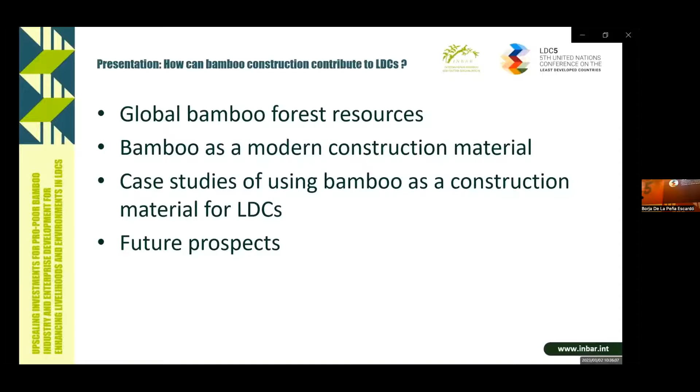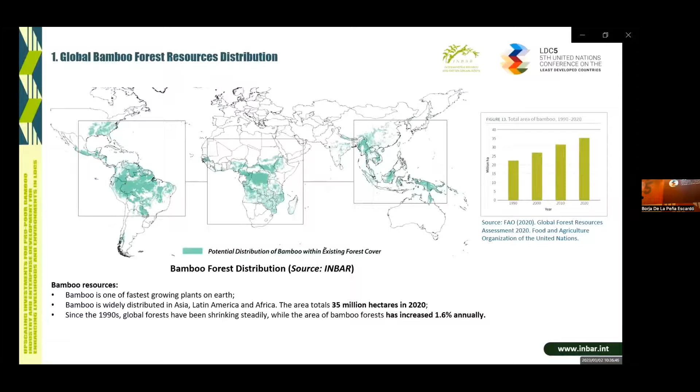Bamboo is really a lovely plant which can contribute to 7 of the UN's SDGs, and it is very close to human life. We could find more than 10,000 bamboo products in the market. Bamboo can really contribute considerable economic value in both domestic and international markets.

Let's have a look at why we can use bamboo as a modern construction material. The first reason is its local availability. There are more than 1,600 bamboo species around the world, although we estimate there are no more than 100 bamboo species which we could use directly for long-term bamboo structures. We can still find commonly used bamboo species for construction purposes in Asia Pacific, the Americas, as well as Africa.

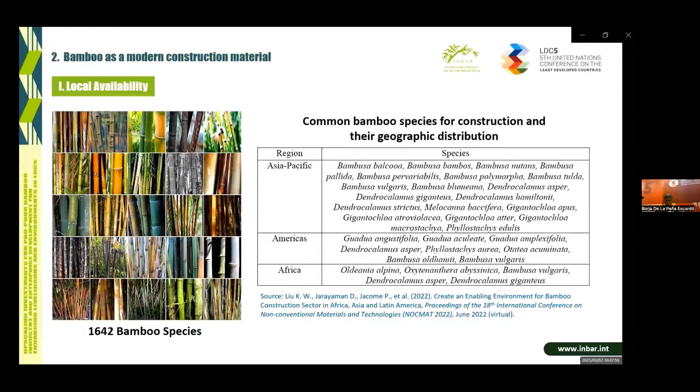The second reason is bamboo's excellent physical and mechanical properties. Bamboo has a natural, optimized structure: hollow, straight, with diaphragms. Can you imagine this material? The tensile strength parallel to fiber of some species is equivalent to that of steel. The compression strength parallel to fiber is equivalent to that of concrete, and its shear strength parallel to fiber is much higher than that of timber.

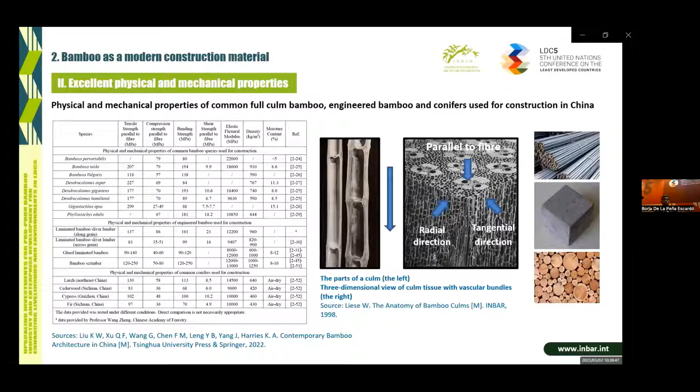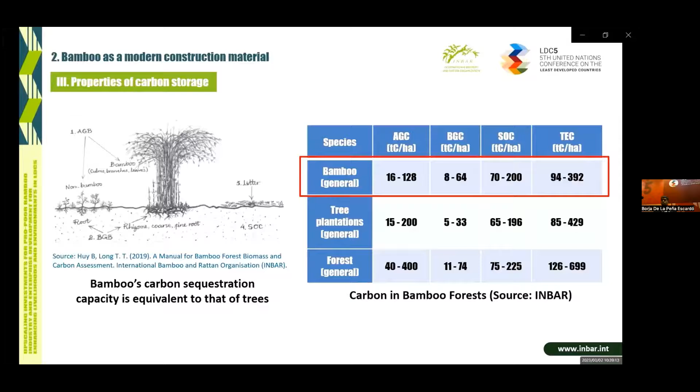The third reason is bamboo's carbon storage capacity. Due to climate change, global scientists are thinking of different ways to help reduce carbon dioxide. Bamboo's carbon sequestration capacity is equivalent to that of trees, which can help mitigate climate change. If we use bamboo to produce durable products, especially as structural components in permanent buildings, carbon can be stored for more than 30 or 50 years. Bamboo could be a good substitute for traditional, higher carbon intensity construction materials such as concrete and steel.

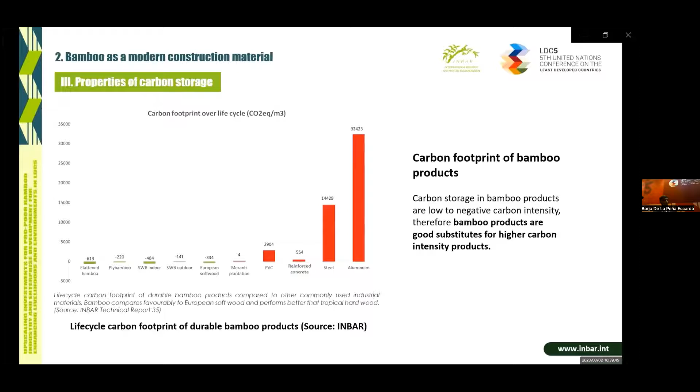Nowadays, we can easily find various commercial bamboo construction products in two categories: round bamboo and engineered bamboo products in both domestic and international markets.

After harvesting and proper treatment, round bamboo culms of different species with age between 3 to 6 years and diameter more than 5 centimeters can be used directly as structural components in buildings. With more stable physical and mechanical properties and uniform sizes, engineered bamboo products become more and more popular and gain commercial importance in the international markets.

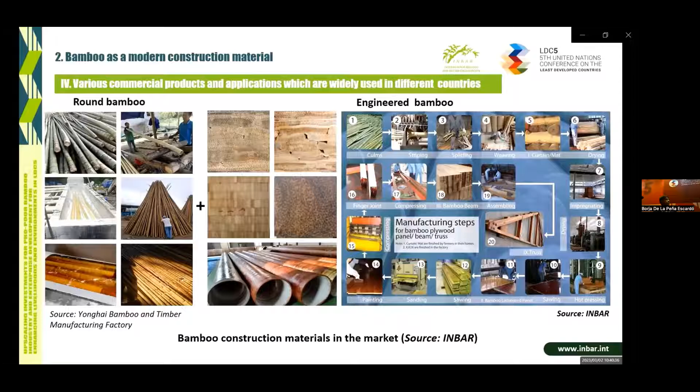There are 5 major applications of bamboo for construction across the world. We can use bamboo for decorations in large-scale public buildings like art museums, theaters, airports. We can also use them in 1 to 3-story buildings as structural components. Open bamboo landscape architecture attracts more and more landscape designers nowadays. Small-scale transportation infrastructure and water pipes can also use bamboo materials.

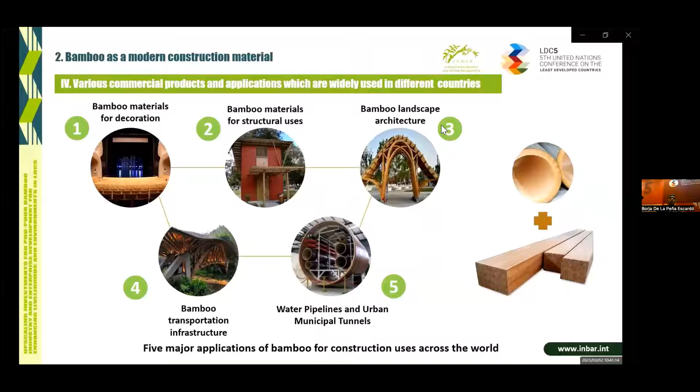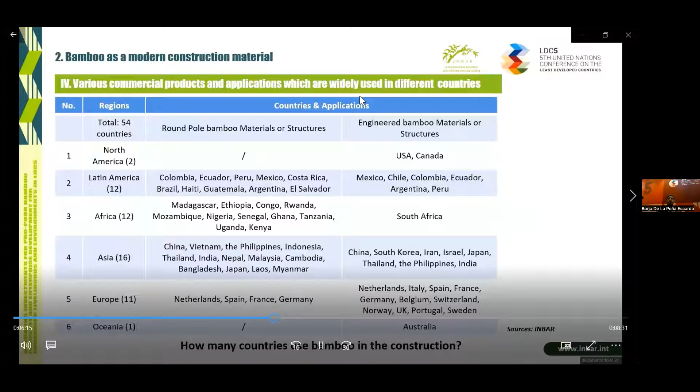According to INBAR data, there are more than 50 countries using round bamboo or engineered bamboo materials or structures. Since 2000, INBAR has been working with global experts to start the work of international standardization for structural uses of bamboo. International standards for round bamboo structures have been well established, while those for engineered bamboo structures are under development.

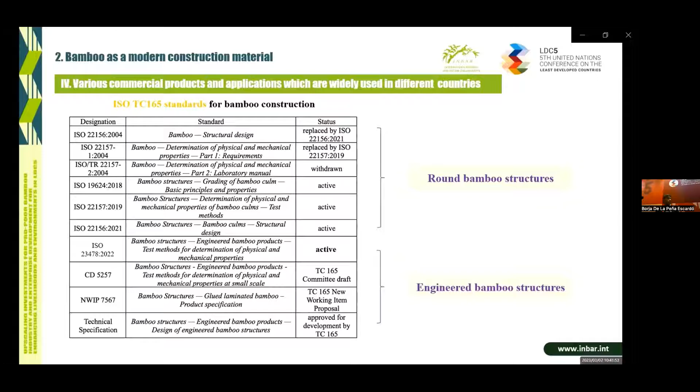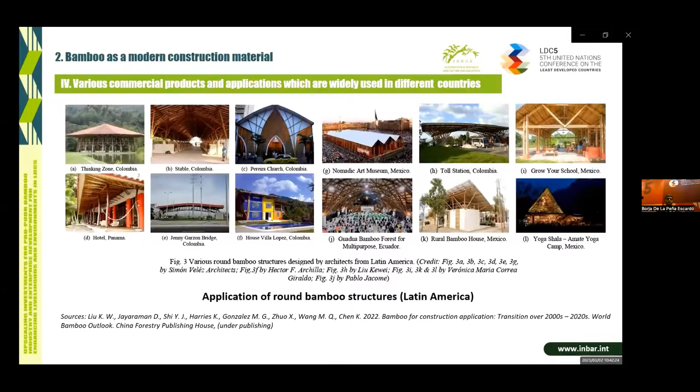Nearly 20 countries have issued their national standards on bamboo construction. Therefore, you can find various round bamboo structures in Latin America, in Mexico, Colombia, Panama, Ecuador, in Asia like Indonesia, India, Thailand, and China. Lots of engineered bamboo structures have also emerged in recent 7 to 8 years in China, also for temporary buildings after earthquake disaster.

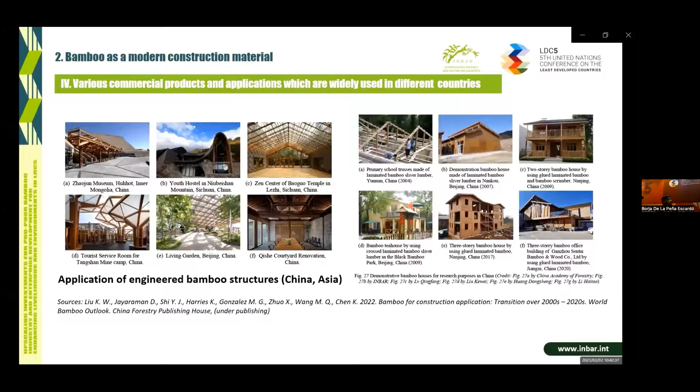Now, let me share some INBAR experience based on several case studies of using bamboo as a construction material for least developed countries. In 2011, INBAR worked with the Ministry of Agriculture and Forests of Bhutan to help them explore how to use bamboo to replace timber for construction purposes, to keep Bhutan's forest cover more than 60%. We used modern technologies, used less timber, lowered the price, and adapted existing local carpentry skills there.

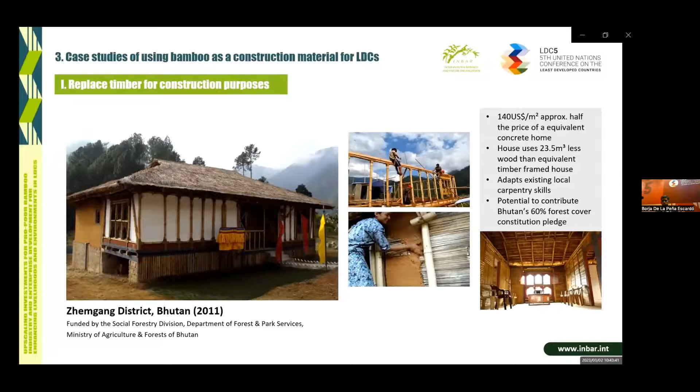At the same period, we trained local workers and students by teaching them how to use raw bamboo as well as newly emerged engineered bamboo as modern construction material, to promote local industry through our East Africa project.

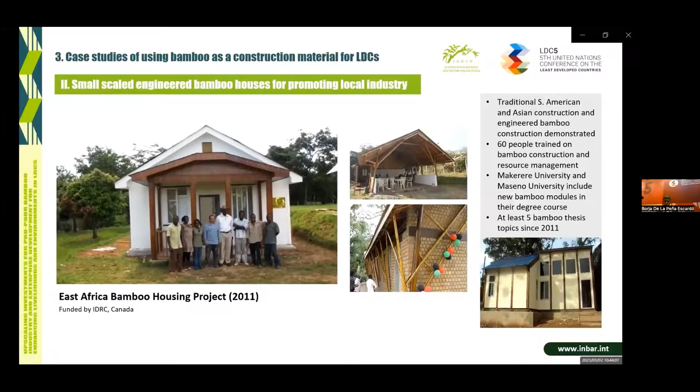In 2016, after the earthquake in Nepal, INBAR organized experts to design bamboo classrooms to help post-disaster reconstruction. Local bamboo was used legally there for the first time for classroom reconstruction.

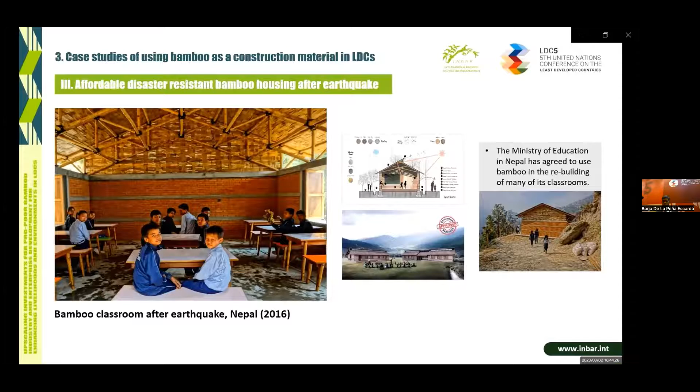Although there is no least developed countries in Latin America, what we have done in Ecuador in the past 10 years can also help those least developed countries who have the same problem, such as the needs of adaptation to climate change. Improved design, preservation, and new engineered panels of a new elevated bamboo house have greatly lengthened the lifespan from a traditional 5 years to 20 years.

And above all, the demonstration bamboo house is not only a durable house, but also has an elegant living condition.

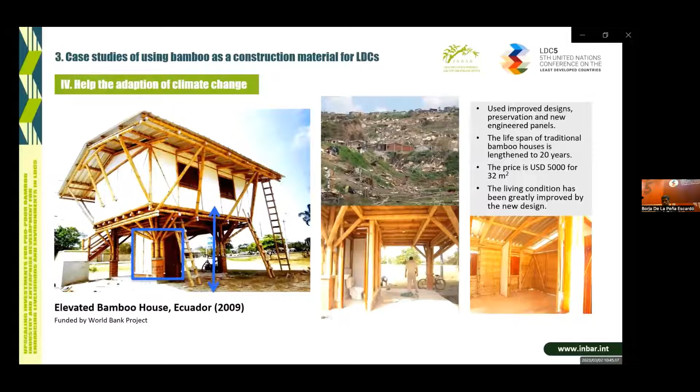The demonstration house, which we built during 2018 to 2019 in Ecuador, shows to the local authorities and general public how bamboo is a natural resource which can help countries face the effects of climate change and provide practical and quality alternatives for the population through resistant building systems.

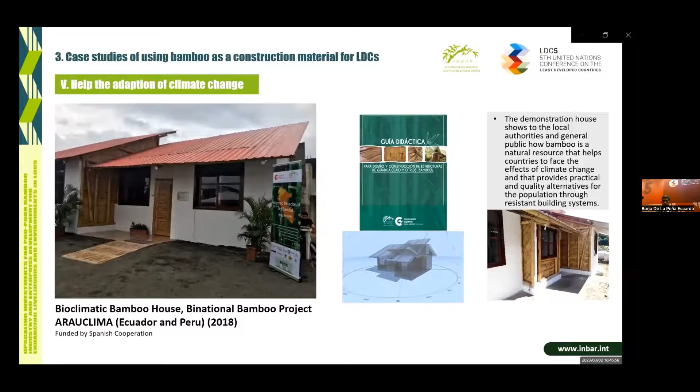For the projects carried out in India in 2017, we helped the local community identify construction species for shelter construction, and provided strategies and approaches to improve the durability and disaster resistance capacity of local bamboo houses.

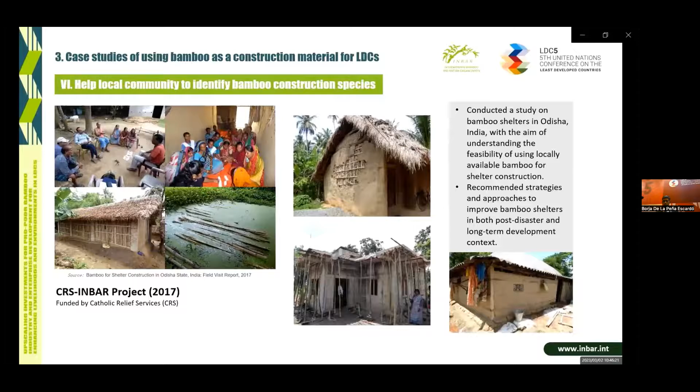For the 2019 BRAC construction training program, aimed at training 4 construction professionals from BRAC based in Bangladesh, we taught them how to use bamboo as a construction material, how to improve durability, and delivered a series of training courses, leading them to visit a series of enterprises located in China, showcasing how to build a modern bamboo house using modern technologies.

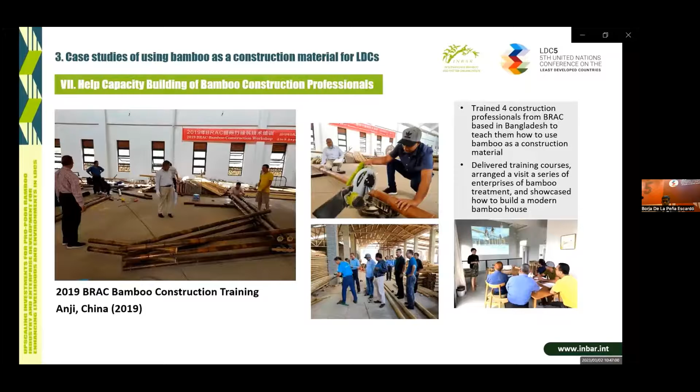There are still lots of challenges to mainstream bamboo use as a construction material, like how to make a sustainable supply chain for bamboo construction species resources, how to properly harvest and mark the proper age of different bamboo species, how to make proper treatment and joints, and how to develop national policies and national standards.

However, I am very sure we can do something for those least developed countries who are willing to use bamboo. Firstly, I think we can help those least developed countries who have bamboo resources to identify bamboo construction species and learn how to carry out sustainable management of bamboo forests.

Secondly, help least developed countries who are interested in using bamboo as a construction material to adopt ISO standards as their national standards. The third one, help them develop national policies for using bamboo, not only for construction. The fourth one, help them strengthen the capacity building of bamboo construction professionals by using the expertise of the bamboo construction task force, which comprises more than 30 bamboo construction experts from nearly 20 countries across the world.

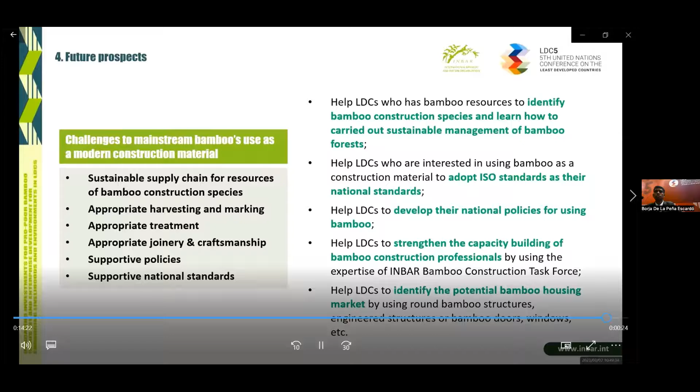Because of time limits, I have to close my presentation. Here I provide my email address. If you have any questions, please feel free to contact me or discuss with my colleagues.

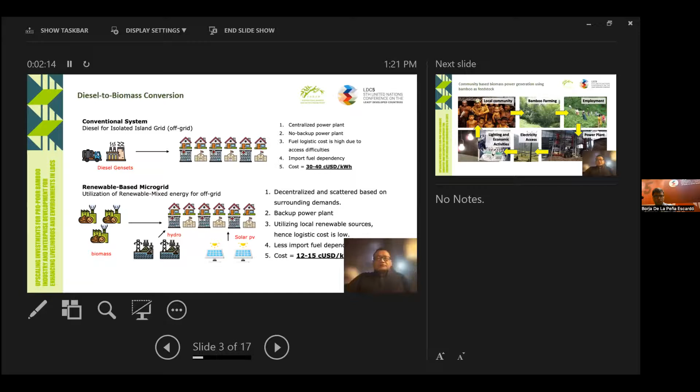We see this opportunity in Indonesia to replicate this model to other regions as well, because the government of Indonesia has established an entity called Indonesia Environmental Fund. The role of this fund is to give incentive for the local community to grow bamboo, and we as IPP then become operator of this bamboo, and we use this as a biomass feedstock. What we provide electricity through the state-owned utility company, then the PLN will also save money.

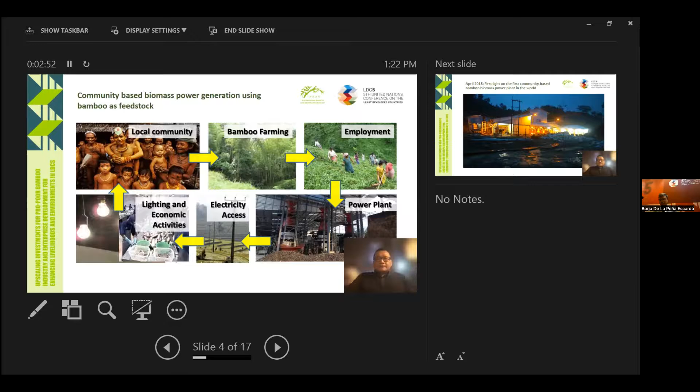So it means that the government provides incentive not only for the local community, but also they will be able to subsidize the electricity from the people, and we get these carbon credits that we hand over to the government, and in return government provides this incentive. So we put these findings and model into our collaboration with the CIFOR-ICRAF.

So we discussed about how we make sure that there's a monetary return, human return, and also nature capital return. So it's not only that it will make money for the investor, but also it will bring multiple benefits to the locals, and it protects the environment surrounding this power plant.

We also collaborate with Alliance for Rural Electrification to disseminate about this idea, and back in 2019 they published this report, and they compare the bamboo biomass power plant with the solar PV or small hydro, and the findings are quite exciting because the bamboo biomass power plant creates more jobs and also has much higher emission reduction. So I think that's good news.

So I think this is a model that can be replicated to other developing countries. And we are collaborating with CIFOR, not only to produce bioenergy, but we are thinking about producing biomaterial. Bioenergy, and the whole green economy thing, will help the whole world to keep the temperature below 1.5. That's the goal, and I think bioenergy will play a big role in that.

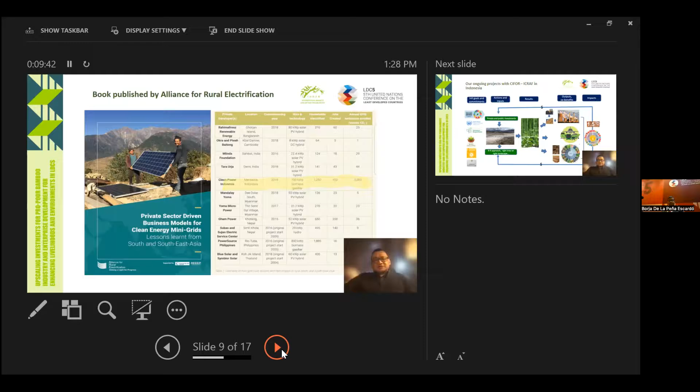And the overall impact, I think, is going to be huge for Indonesia. Not only can we improve electricity supply and distribution for 25,000 villages, but also restore 14 million hectares, and diesel gensets can be replaced. We normally speak of around 2,000 to 4,000 megawatts.

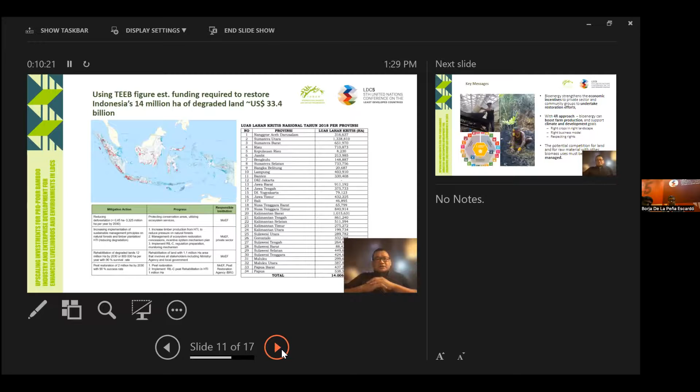And that is all for today. I'd like to get back to the moderator for question and answer. Thank you.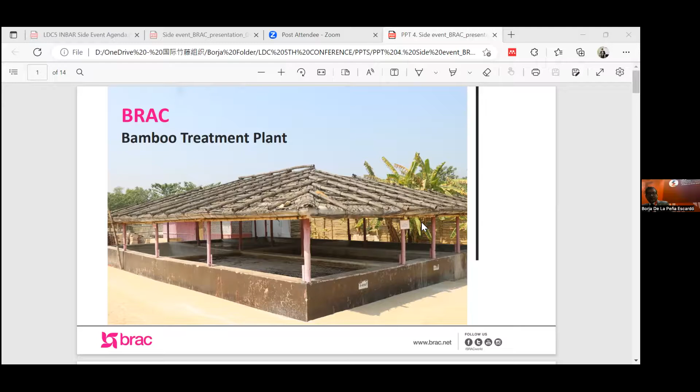What's that? The other one is different. Sorry. I'll not be... go down, next slide. I'll not be touching this, next slide.

Yeah, I think it's important. Let me share with you the context. Many of you, I'm sure, have heard about the Rohingya refugees in Bangladesh. Suddenly in 2017, we saw more than 1 million Rohingya enter Bangladesh, and Bangladesh, being a poor country, had to accommodate them. This was in the southern part of Bangladesh, in a place called Cox's Bazar. We had to accommodate them in a way that wasn't only about housing and shelter, but everything altogether. We were under tremendous pressure on how to support them with shelter, water and sanitation, and other basic necessities.

At BRAC, we believe we don't have to wait for everyone. We try to find out what is really required at that moment for the communities. We came up with the idea of how we can use nature without harming it to also support the Rohingya refugee communities there. This is where the whole idea of bamboo plants came in. With support from UNHCR, we immediately established 3 bamboo plants there. It took us some time—about a year—to understand the whole thing, and then we established 3 bamboo plants in the southern part of Bangladesh in the Rohingya camps. At that time, the government didn't give us any specific instructions; they just told us that we couldn't build any permanent structure.

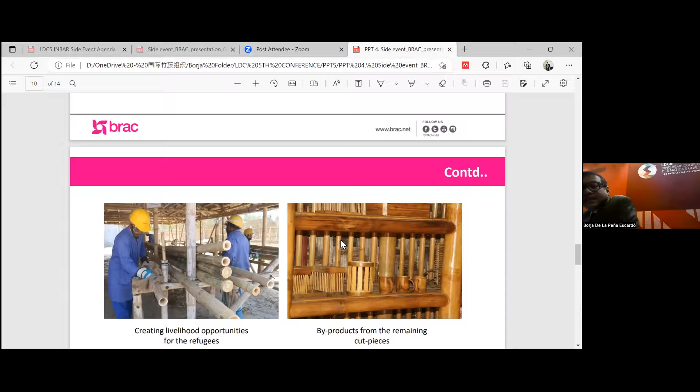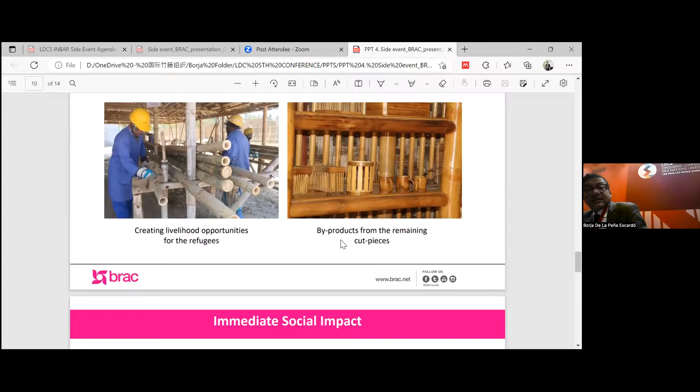Second, I will not be touching this slide, the talks and others, as my colleague already mentioned. Next slide, he already mentioned. But the second point is the social impact.

It's very early to say something about the social impact, but what we have seen is that in these vulnerable situations, Rohingya women and girls now feel that their safety and protection has increased manifold because they have good houses and other facilities. At the same time, they also report that mental stress and physical stress, particularly for women, girls and children, has also been reduced manifold.

They feel that they can leave their children in the shelter, and to some extent, what we are finding in early results is that the time spent in relation to health supports and services has also been reduced, so they can spend more time on other purposes. These are very early findings from that.

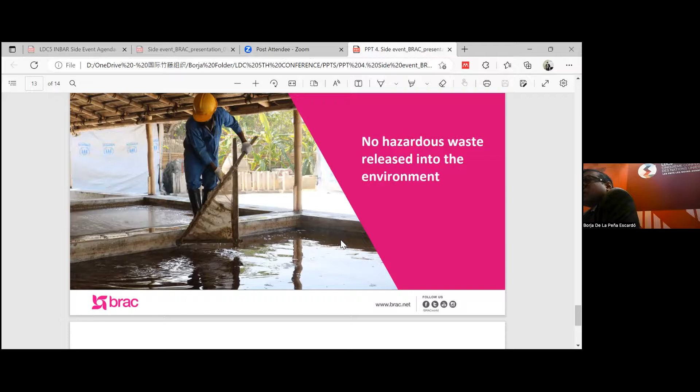Moving on, in relation to environment, we haven't found anything so far that is harmful. We went through the plant, and whatever residue we are getting is really useful. What we're doing right now is using those residues and turning them into fertilizers, for kitchen gardening and others. We are testing those at the moment, but our plan is to provide them also to small households so they can use them.

That is basically my last point, but I'd like to end, it will take only 60 seconds, I think it's so important. What we have learned through this bamboo plant is that there are extremely vulnerable individuals, and targeting is important. We really need to target them very well, that's one.

Number two, take your own time, 10 months, one year, two years, and make the plans or actions in such a way that really helps the community. We are working on it.

The third is that very often, in LDCs and poor countries, government policies take time. But we cannot afford to wait. We have to reach there. We would like to see more connections between policy formulation and actions on the ground, how those are connected, and how we can get the poorest communities' voices into the whole decision-making process. I think this is really important.

Through this bamboo treatment plant, we learned these three things, and we are going to work on this over the next 12 to 24 months in Bangladesh. To take it to a more national level, we are going to expand it from the refugee camps to other places. We started seeing the benefits of it, and we want to take it there, but we need more government support, policy support, and investment support so we can take it to the next level and scale up.

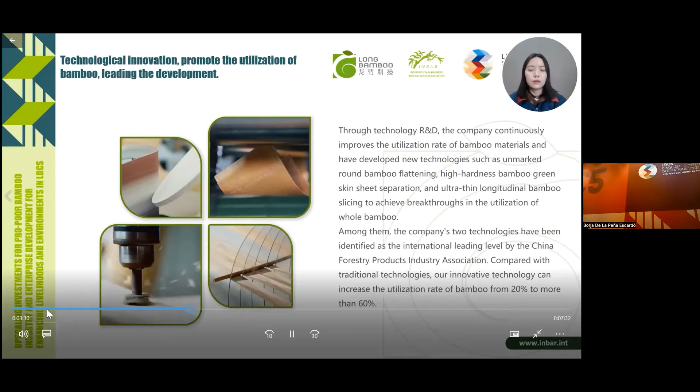Through technology research and development, the company continuously improves the utilization rate of bamboo materials and has developed new technologies, such as unmarked round bamboo flattening, high hardness bamboo green skin sheet separation, and longitudinal bamboo slicing to achieve breakthroughs in utilization of whole bamboo. Two of the company's technologies have been identified as international leading level by the China Forestry Products Industry Association. Compared with traditional technologies, our innovative technology can increase the utilization rate of bamboo from 20% to more than 60%, allowing bamboo to be fully developed, reducing material costs and enhancing the competitiveness of bamboo industry products.

Adopting alternatives is one way to reduce plastic pollution. In a context of global plastic restrictions, developing bamboo to replace plastic is an exploration of the future development of not only the Chinese bamboo industry, but also the global bamboo industry. At present, the company has developed bamboo straws, bamboo cups, bamboo knives, forks, and spoons, and other related bamboo products. We strive to make more new breakthroughs in bamboo processing technology and bamboo biotechnology, to develop more new products using bamboo instead of plastic, and to explore the fields of healthcare, construction, transportation, sports, and other new fields.

The annual output of moso bamboo in China is about 48 billion to 54 billion kilograms. There are about 20 billion kilograms of leftovers each year, and about 2 billion kilograms in Nanping. We plan to solve the comprehensive utilization of bamboo processing leftovers through pyrolysis technology, producing carbon, generating electricity, hydrogen, heat, and so on.

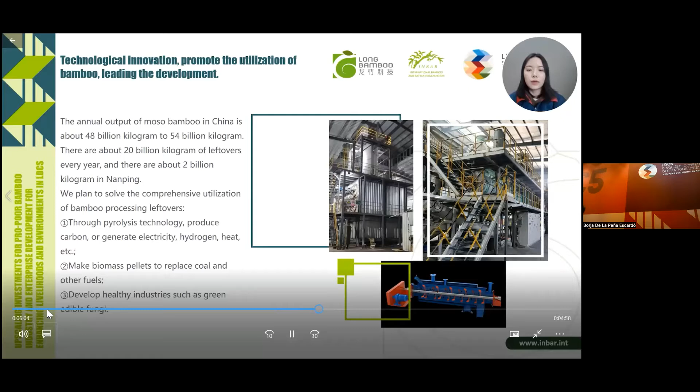We make biomass pellets to replace coal and other fuels, and develop healthy industries such as green edible fungi. The development of comprehensive utilization of bamboo leftover recycling not only expands the field of the bamboo industry, but also increases the green economy for society, truly realizing zero waste of bamboo resources. The pyrolysis polygeneration project of bamboo leftovers and raw bamboo we are developing has realized green and low carbon development, and has also helped the country achieve its double carbon goal.

Another direction for enterprises related to social responsibility is to take responsibility, build green industry, and benefit society. We advocate the concept of sustainable development to maintain the biodiversity of the ecosystem. Protecting the environment has become the consensus of the international community. In order to solve environmental pollution, promote energy conservation and emission reduction, and deal with climate change, it provides green and sustainable development based on nature.

Long Bamboo builds a complete supply chain system, from the initial processing of upstream raw materials, to deep processing and production of bamboo products midstream, to the sales of downstream bamboo products, based on its own industrial advantages, taking '10,000 enterprises helping 10,000 villages' as an important point to help the villagers.

Long Bamboo establishes connections with farmers through the form of company-cooperative-farmer households, radiating more than 200,000 hectares of bamboo forests in Nanping and more than 20,000 bamboo farmers. Bamboo actively promotes FSC joint forest certification to improve the bamboo forest management level of bamboo farmers, to promote rural revitalization, increase income, and create tax revenue in the region.

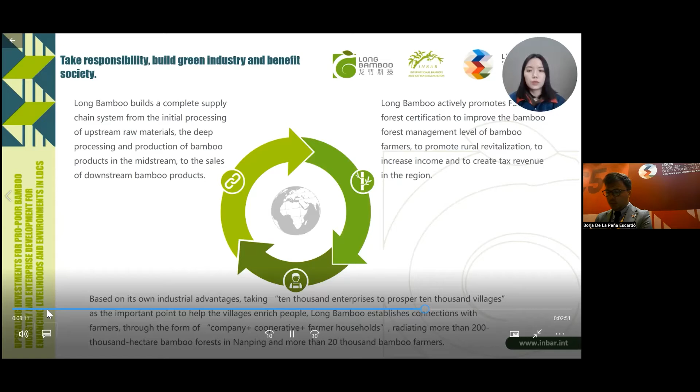The company follows the principle of cultivating more talents, driving the economy, and enriching the locals. Long Bamboo creates employment opportunities at home in Nanping, providing more than 900 jobs, attracting more than 200 migrant workers to return to their hometown for employment. We actively build a two-way docking platform between enterprises and job applicants, and strive to increase the employment rate. We organize practical, technical training and educational studies to improve employees' labor skills and overall quality.

The company seriously implements relevant national laws, regulations, and normative standards in environmental protection, energy saving and consumption reduction, safety protection, and occupational health. Long Bamboo took the lead in establishing and certifying ISO 9001 quality management, ISO 14001 environmental management, ISO 50001 energy management, and ISO 45001 occupational health and safety management, as well as the FSC forest system and other systems in the bamboo industry. We adhere to implementing green manufacturing projects.